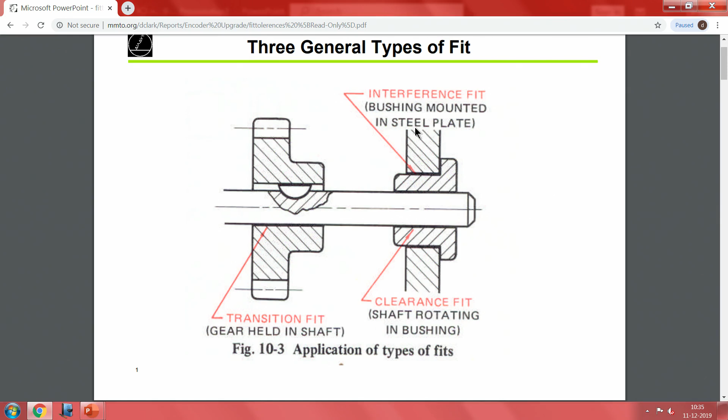Kindly look at my monitor. One of the things you will notice is this has been derived from actual practice. In a comprehensive way, all three fits are shown here. If you remember, I mentioned this about how to fit a bearing into a housing. So this is actually the starting point.

If you notice here, something has been done to make sure that any bush, usually a bronze bush, also called gunmetal, is made out of a particular type of bronze material. Traditionally this was used directly as a bush for various bearing type applications. In fact, you have bearing material separately, and the processing and metallurgy itself is slightly different. It is a softer material and it runs well, and there is something about the tribology of it, how it takes oil and so on.

You will see the outer part of it is called an interference fit, so you push something and almost force it into that slot. On the other side we have a clearance fit. A clearance fit is actually something which is rotating inside. See, in this there is a beautiful option for it to rotate. We are not going to put a separate ball bearing here; there is no necessity of a ball bearing. What is done is you make a sufficient amount of clearance here, and that is what the word clearance means.

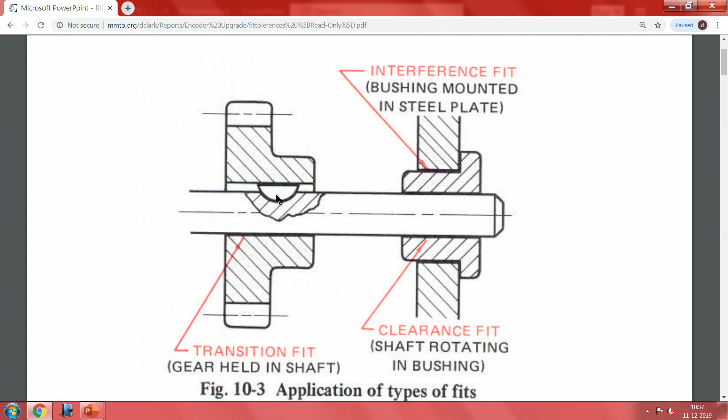The other extreme is a transition fit, meaning sometimes it may lock, sometimes it may not lock, and we add another item to hold it in place. So all these types are possible, and depending on this, this particular thing is a key, and there is a keyway, and how we lock it inside is very, very critical.

Now, if I come down, this is what I was trying to talk to you about yesterday. You will notice here that the hole itself can have a range of permitted dimensions which come out based on the type of machining you use.

Normally, if the machine is kept under one particular setting and the tools are good and the material is good and closely monitored, this follows a very average normal yield. I am not talking about the statistical thing about whether it is a bell curve or a normalized curve, but it does follow certain things, a certain yield which you can get from the machine.

Similarly, we have a shaft which goes inside like this. So you will end up with a very peculiar thing saying this is the tolerance that has been given. This tolerance is represented here as 0.05 millimeters, and similarly there is a tolerance given here for hole tolerances, that is also again 0.05.

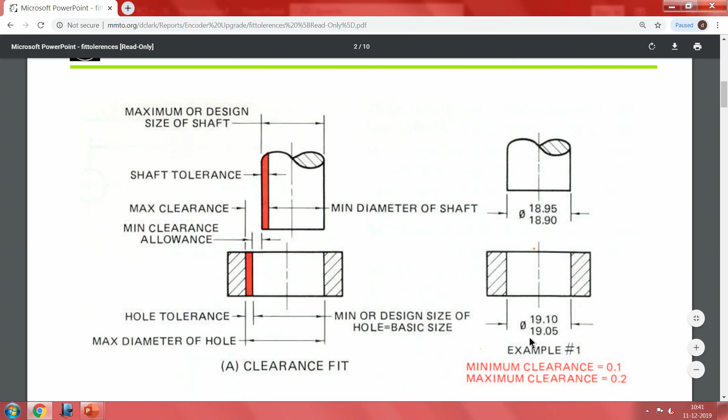But the moment we came into the industrial revolution and had to end up with large number of interchangeable parts, this business of clearance and tolerances has become very, very real.

Now, something very related to this is that you cannot arbitrarily give anything you want here, because when it is produced in the machine shop, somebody has to set the machine and somebody has to inspect the parts, saying which is acceptable, which is not acceptable.

This is where, to make things a little more inexpensive, the concept of designating a batch came in, saying you can have all these things now, something which is on the lower end, something which is nominal, something at the higher end, and call it type A, B, C, D, where the fit is very, very critical, as in the case of a cylinder and a piston.

Or in the case of a cylinder liner, the whole thing is stamped on it. After the measurement is done, they stamp the designation on it, saying this comes under class A, meaning this follows this, and so on.

But then normally earlier it was easy, you just had to make a drawing, probably dimension it and write what you think was a reasonable amount directly. But now once this CAD way of designation came about, especially in the case of simple two-dimensional or drafting representation versus actual 3D assembly representation, all this is to be carried out with due care.

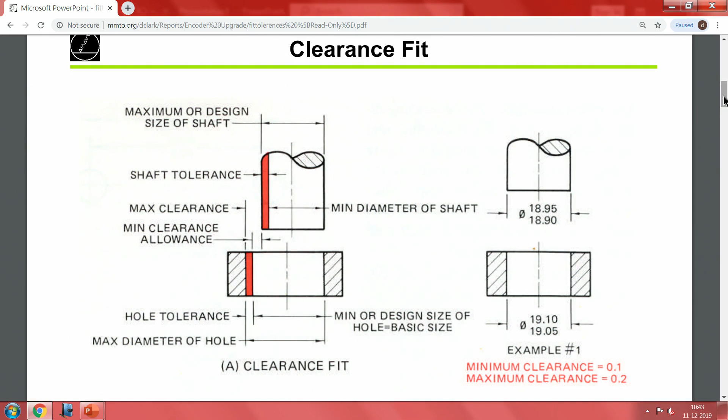Now let me go to the transition fit. If you see here compared to the other one, you will notice here that both possibilities are there. So if you take a shaft which is at the maximum diameter and then you take a hole which is at the minimum diameter, under some conditions an interference can occur.

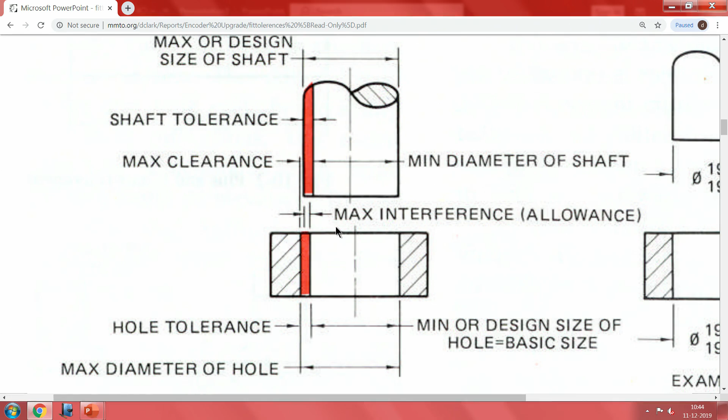Now it is for you to decide how to deal with it, and so on. Right now I will not talk about it, I am just talking to you about the fact that such a thing is called a transition fit. So if you go here and the way things are made, we tend to give some designation there, and this is where things have changed a little over the years.

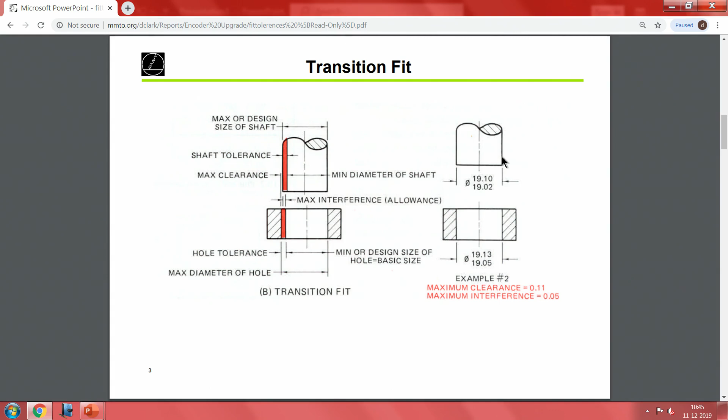It is not correct for you to arbitrarily give what you think is a reasonable way of mentioning these things. The problem is that carrying out the inspection and the assembly becomes very uneconomical if you keep narrowing these allowances and tolerances. In principle you can make it near zero, but it will be very expensive to make such a thing. So depending on the type of running and the type of application, we need to make something appropriate.

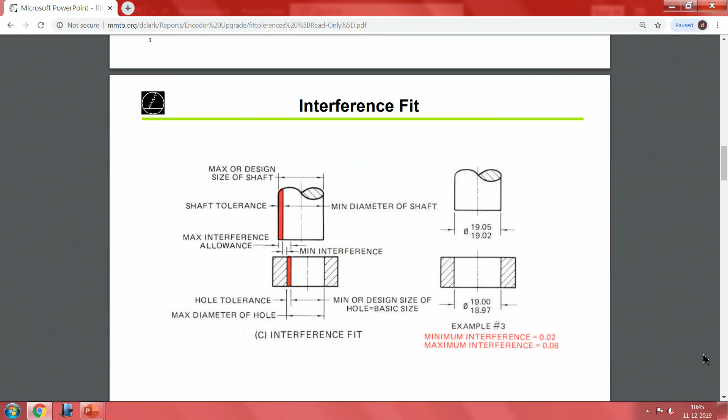Now you come to genuine interference fit. In the case of the interference fit, under all conditions, the parts must be completely joined together and lock itself fully. This is called a pure interference fit. If you remember the first example, there was a bearing sleeve fitted into a plate. There, under all conditions, it should maintain itself well. Various types of such things are there.

Have a look at this nice interesting thing I have. Sir, can you please show this? It has got merged in it, so maybe I should put it here. Very nice and interesting thing.

Do not worry too much about the design. This has been made by a company and given as a nice goodbye gift. I am trying to take a sip. Good. Water with or without spirit tastes good.

Now, if I see this, this is made by another company. They are probably competitors. They have ensured that this will not fit that, and they have patented the thing - this thread and all they have patented. From a purely commercial point of view, they have made a design by which it will not fit under all conditions, and naturally there is no problem, even by mistake it will not fit, which brings me to a very interesting aspect of this fabrication.

Now, when we come to this, if you see the way we show it on the drawings, this is very clear.

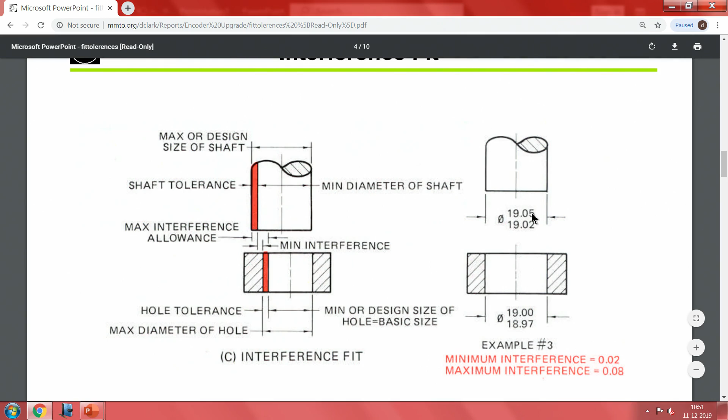Earlier I thought life was easy. All we had to do is go to the fabrication shop, go to the supplier and ask him what he thinks is best. So I would just erase, or use something called a modification or change note, saying this diameter 19 millimeters, the tolerances have been changed. But the moment the CAD system came, it became inconvenient to just rub out the dimensions and change them. Instead, you are expected to use a different approach.

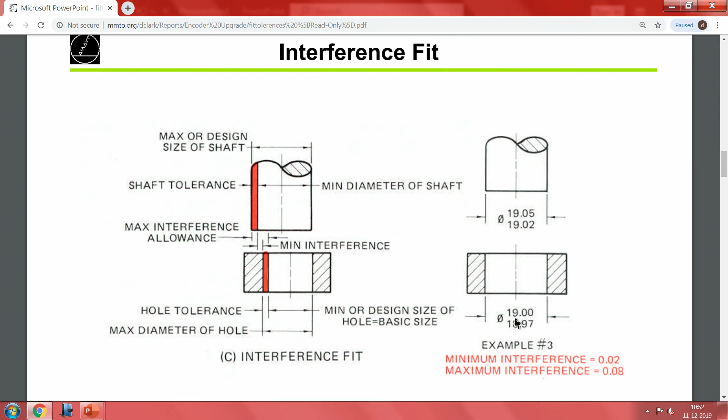This is where the advantage of having solid modeler CAD comes in. Several systems, specifically SolidWorks and others from Siemens as well as Dassault, make these solid modelers with what is called associative dimensioning, bidirectional associative dimensioning. This means if I change the dimension or tolerance here, the shape of the part changes automatically. Similarly, if I change the part, these dimensions change automatically, which helps in certain conditions we can look at. These professional tools can also take care of various types of tolerancing and fits for holes and shafts.

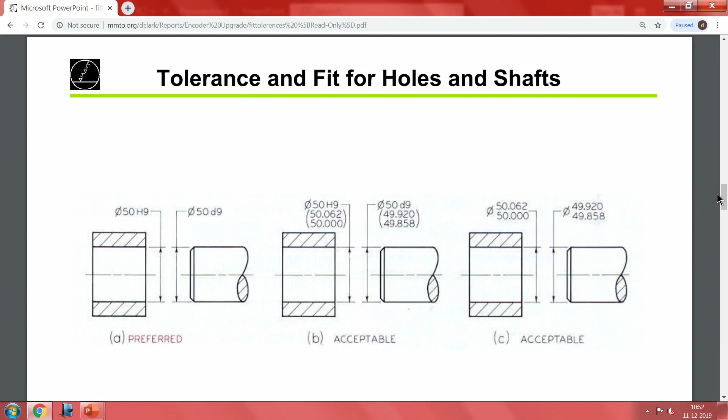You have seen something about this here, which I was trying to tell you all along. Probably it did not make much sense, except to people actually in the field. If you had waited a little, you will know what it is I was trying to talk to you about.

This is called designation of a fit. The nominal dimension shown here is 50 millimeters, and from the nominal letter designation, you'll notice capital H and 9 has been specified, and in the case of the shaft which goes inside, a lowercase letter and another number has been designated. Combinations of these have been standardized with different types of materials, different operating conditions, and so on.

Occasionally people write down the actual values. This helps in case you are making a small number of parts and you have a screw gauge or a profile projector with which you measure these dimensions, so you know where you stand. You understand, no? Both dimensions, the plus 062 and nominal value, have been mentioned here. In the case of the shaft, while the nominal is 50 mm, what is designated here, you've seen, is 49.920.

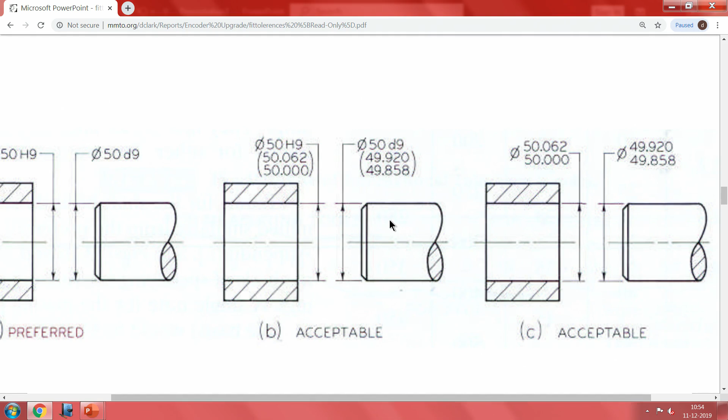This is okay, people can read it and all that, but the thing is, corresponding to this d9, these things have to be perfect. If somewhere in the previous drawing you change something, we may end up with a little problem. And imagine this part comes in one drawing, and this part comes in another drawing. It becomes very difficult to manage these things every time.

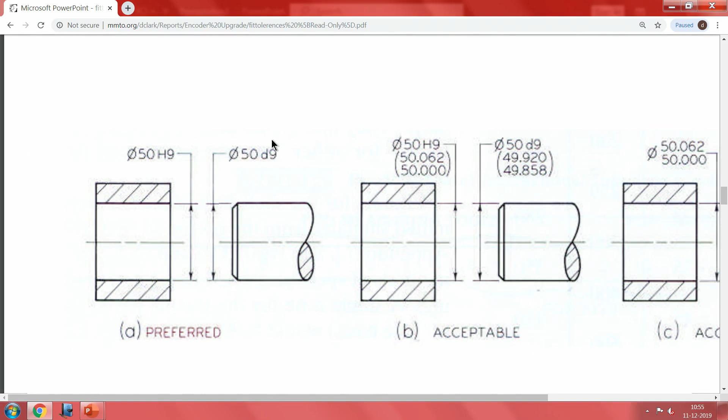This is also acceptable. Instead of showing the nominal, the explicit values have been written here, saying this is the thing, but the most preferred way is just to write the H9 and d9 designation.

So depending on your way of dealing with it, for each of these we have thread gauges, we have go/no-go gauges. Coming back to my example, if you have a thread gauge, imagine this part has to be checked. Deliberately, this thread gauge will have something like this: on one end of the rod we'll have a slightly larger thing, saying it should not go inside—if it goes inside, that means this is larger. The other end will be a little smaller, saying it must go inside. Imagine a large hexagonal holder, one side has a thread following one designation, the other side has another thread following the other designation.

I can quickly put it this way: take random sampling, acceptable quality level. If I get a bin of say 10,000 parts, I randomly select one, try it, and pass all of them. That is statistical—in statistics, it has been designated which should be the quality level.

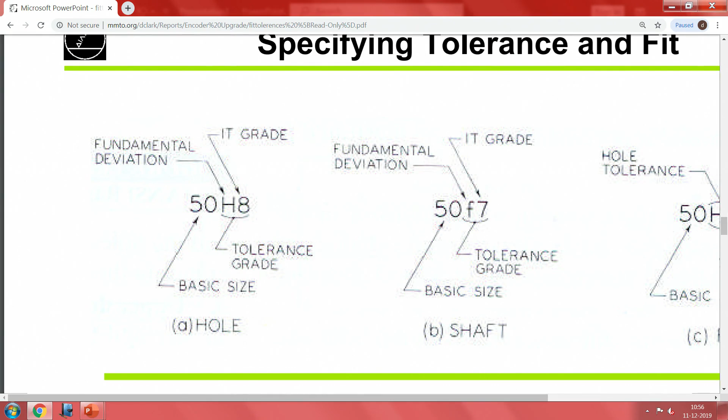Further, if I go down now, you see here at the extreme, on the hole, the basic size has been maintained, and the tolerance grade including a letter designation and including the type of fit that we require is mentioned here.

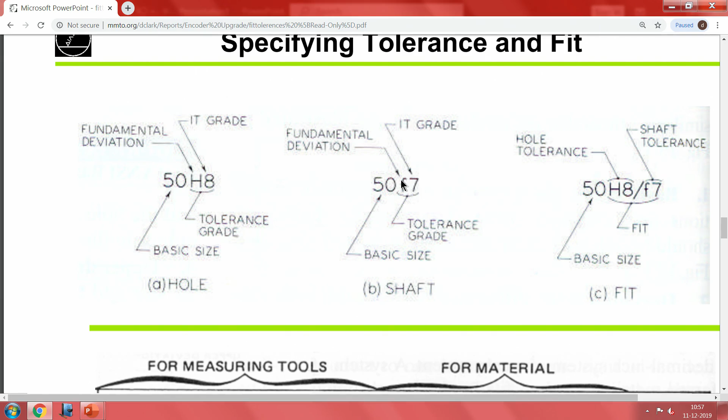And all comes to things which are on one direction. Similarly, in the case of the hole, a smaller letter and then a different designation has been given, and which I was trying to tell you, generally this combination of this saying H8 F7 on 50 is the wanted fit.

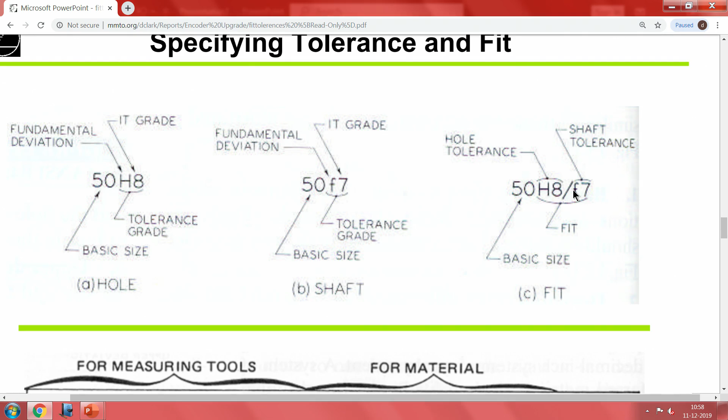Now we come into an important thing. Will the fit be the same in case, I'm sorry, will H8 F7 be the same in case it is a fine screw? Extreme fine screws are probably what you'd find in things like your spectacle frames, or you may find in your pen, or in your automobiles. This is extremely small, and in fact the diameter of this may be some 1.2 millimeters, or 0.8 to 1.2 millimeters. Is this the same for it?

In fact, if you open the book, we have a huge table which shows the type of tolerances which are specified, and large manufacturing tolerances, for measuring tools, and then for materials, for fits and all that. So many of them have been specified.

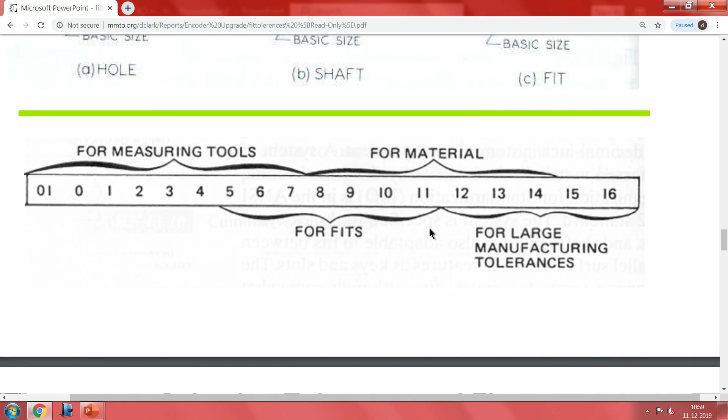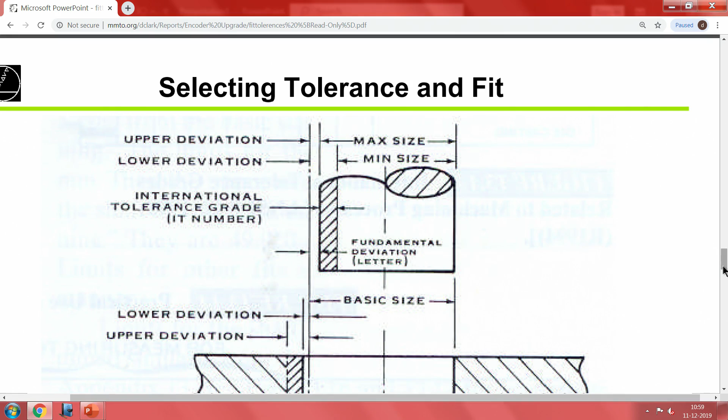You understand? Not easy, it is tough. Tough. Here comes the question of how you select a particular tolerance and fit. It comes to this chart which I was talking to you about. It is a huge chart.

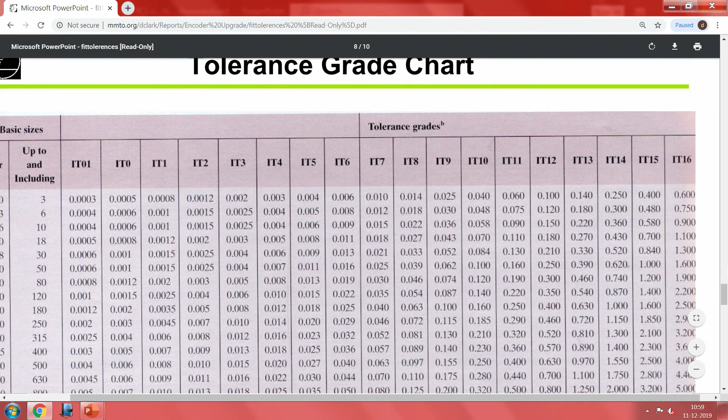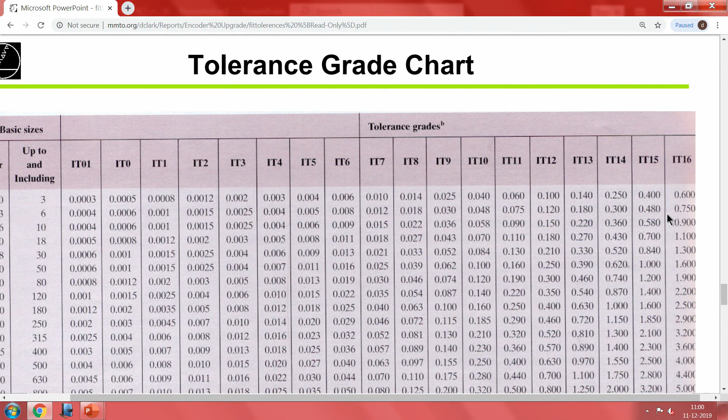So, not easy, is it? As you go to the left, things are extremely expensive, very, very expensive, and as it goes to the right, things are less expensive. Imagine you would like to make something which you push into a wall. If you give it a very tight tolerance, it is pointless, very expensive. Instead, if you give it toward the right, it is easy. That is how most of the dowels, the plastic or wooden things which you push into a wall will be - they're all toward the other extreme.

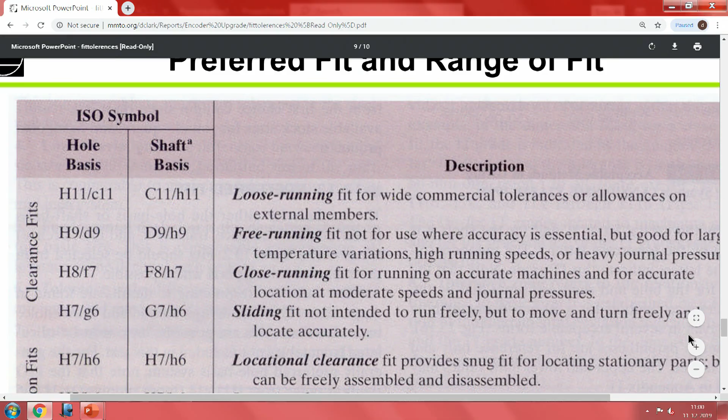Now, I feel you should read this right now on your own - come from left to the right, you keep reading it, you will know. My voice may be a little irritating. So you see hole basis, shaft basis, and so on.

So we have things like H11 C11, saying this is a loose running fit for wide commercial tolerances, allowance on external members. Again, simple commercial, very easy to achieve, does not cost too much money. I will leave you to read the bottom part toward the end of this.

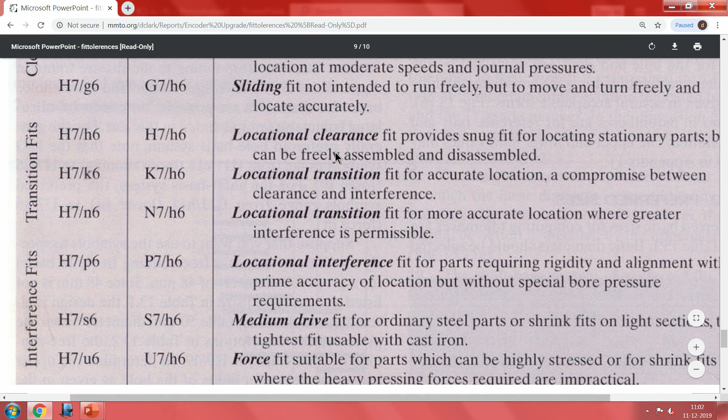And locational or sliding fit - this is something which is quite important. Free running, not for use where accuracy is essential, but good for large temperature variations, high running speeds, or heavy journal pressures. Loosely this has been taken from general engineering descriptions, but all of these are based on actual practices.

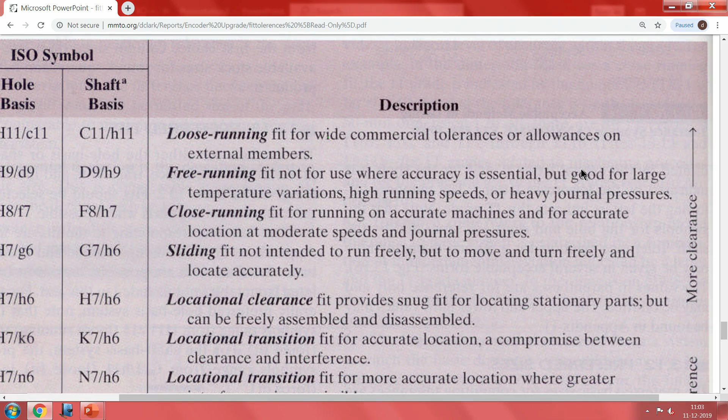You understand? Actual practices on how to make things work. Somebody has actually taken a bush, then they have found out - if it is a large number, they run it on an automate called a Swiss automate, or any of them depending on where you come from. You have Bridgeports, and then we have any number of small machines which quickly maintain all these things.

On the other end we have accurate machines, close running fit, for accurate location at moderate speeds and journal pressures. Typically your sewing machine at home may have this type of close running fit.

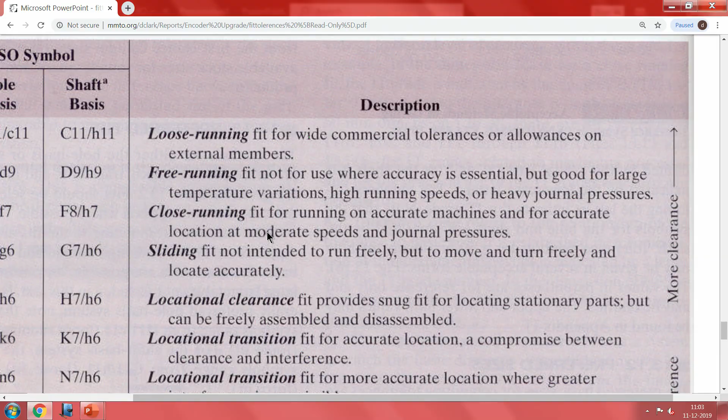You see, not many bearings - ball or roller bearings - will be there in those machines. What will require is actually there is a bush and then you can rotate it, and usually there is, let's say this is a bush like this, then there is a shaft which is moving inside, and usually that whole thing moves inside, there's a small opening for you to lubricate it. In that condition this is the best, and original Singer machines and all that - they still work 100 years after they've been made and sold, they work very well without the least amount of any problems.

They continue to work like this because somebody has paid attention to two details: the type of journal you need and how easy it is to achieve, and the type of sliding part inside.

Now you may wonder, if things are so loose, how can they work? Not every time are things made non-recoverable or non-repairable, or where we tolerate the yield. Usually a second operation including a reamer is used. If the shaft is made standard, we will not touch the shaft much because that creates problems. However, if there is an opening, you can make a proper reamer and adjust it.

So imagine you need a 3.8 mm hole, but it is made into 3.75. You have a special reamer which exactly goes inside, turns, and when you take it off, it nicely sits there without any problem. Using this combination, I will not call it rework, of a second operation and a standard shaft, it is possible to achieve much closer fits, and things work for a very long time.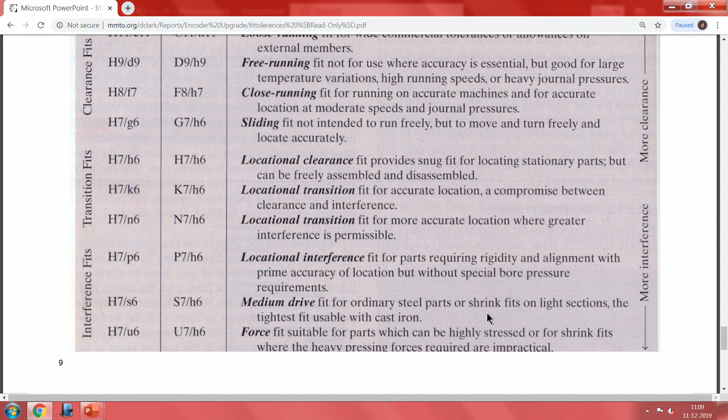Coming back to this, things like pistons and cylinders come with grades printed on them, saying depending on the type of liner you have, or the type of reboring you do, you can select a different piston, and even there you have piston rings which need to have these things. Me being a mechanical engineer, the stress is a little more on this.

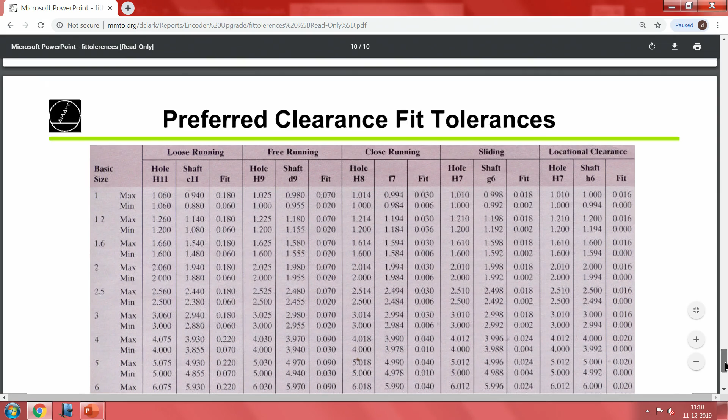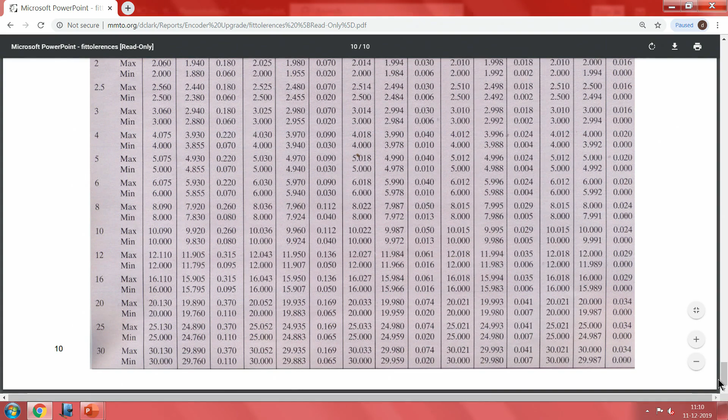So we have here a big clearance fit table, and it shows under all conditions how things run and so on. Basic size at 1 millimeter, and it goes on and on like this, and then we have all these things which work peacefully without the slightest confusion on the workshop premises.

You can easily specify these things in the drawing. And now again, let me tell you, in the new type of software where solid modeling is done, there is a provision for you to include all these things in that. So you have seen that bush first drawing, if you remember, I will take you back to the very first drawing.

It is possible now you mention a proper type of fit here, a proper type of elements here, or clearance fit, and due to some optimization you decide to change the shaft, saying instead of a 6 millimeter shaft, or instead of a 1/8 inch shaft which is going to be 3 point something something, which will change to 3.2, because the quarter inch is 6.35. So that the other shaft could be 3.175, and the new shaft we have is 3.2 millimeters, which is slightly different, or you may end up with a 3 millimeter shaft.

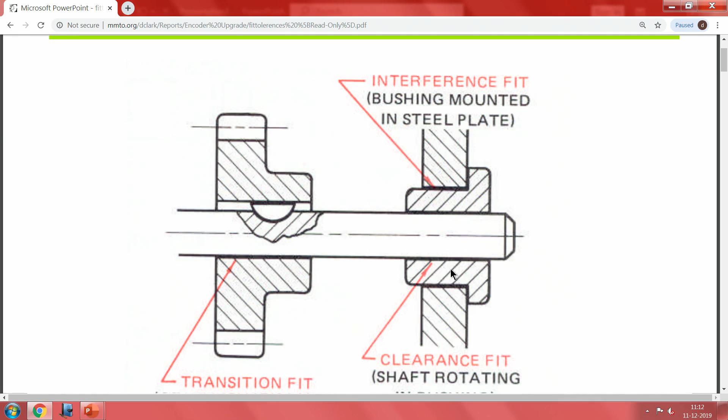Now you have the advantage that you can play with all these things, and at one place if you change, all of the other things will be taken care of. It also involves that you mention what is the minimum material required for the bush. So, in the full fledged assembly software, all these things are peacefully built in, and life goes on without the slightest issue.

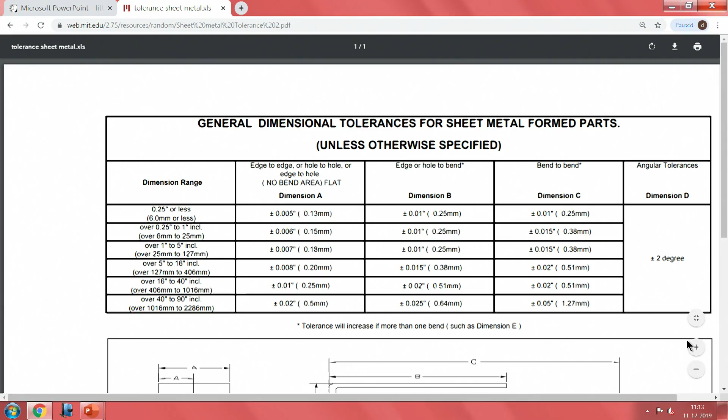So, if I now go back, most of our electronic enclosures end up being made with sheet metal. Sheet metal by definition just means any flat sheet, but by default it is assumed that it is made with one type of cold rolled sheet with a particular carbon composition which we call mild steel. So do not be upset if you just say sheet metal and people give you something made out of cold rolled sheet.

Whenever somebody says it is made of sheet metal, it is like that, and added to that it also generally comes with various types of finishes on top of it. Why I mention finishes is cadmium has been found to be dangerous, so cadmium is not used anymore, but nickel is used instead, or if price is lower, zinc is coated like that. All these things, including the zinc plating, including the basic material, and depending on the types of processes used, are very critical when we specify the various types of tolerances and fits on our dimensions.

So, I will stop here and try to come back later and explain this to you in the next lecture. So far I have just talked about the very basic fits and tolerances and why it is important for us to put them into a drawing, because manufacture is not like simply making a drawing and somebody will work on it. If we do that, we will again be coming back to just taking an old drawing and trying to digitize it and letting things go.

So, I will come back to this later, which in a very big way relates to edge to hole, bend to bend, what the tolerances are, and then general tolerances, edge to edge or hole to hole. If you recollect seeing the workshop video, I think part of lecture 7 or 8, after the bending you see there is a very peculiar spring back available. So they will try their best. In this case ours is a folding machine. At the back there are certain stops to ensure that if you compensate for the spring back, the part that comes out is practically usable.

It is not 100% 90 degrees, but this tolerance of plus or minus 2 degrees is built inside. There are some adjustments which ensure that the lever you are operating stops there. So, thank you, I will get back next time. Thank you.